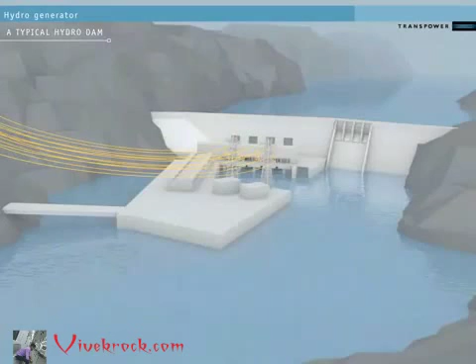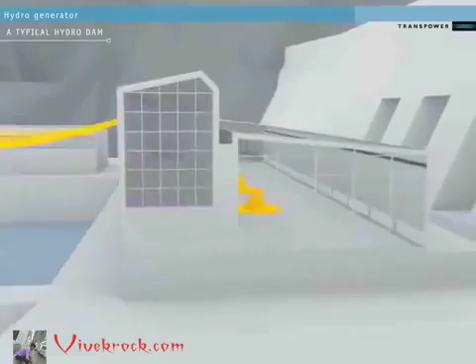From outside the station, we can't see the generators. If we approach, though, we can see the power lines or conductors that carry the electricity from the station to the national grid. Each power conductor connects to a turbine-powered generator inside the dam itself. Let's go inside the dam now and look at one hydro generator to see how the power is produced.

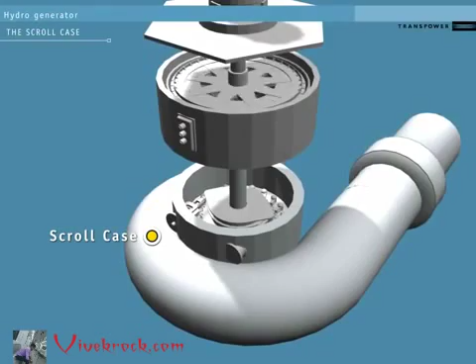The water from above the dam flows down through pipes called penstocks. Each penstock has its own headgate at the top to stop water flow for maintenance or during an emergency. At the end of the penstock is the scroll case. This curls around the turbine like a snail shell. It's designed to create a consistent pressure of water entering the turbine from all sides.

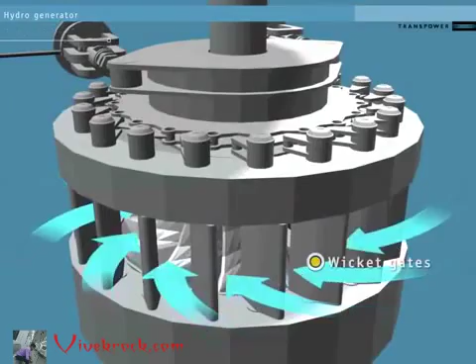Inside the scroll case is a set of vanes called the wicket gates. These control how water flows into the turbine. The wicket gates are controlled by an external governor system. This opens and closes them in response to conditions on the national grid. A high load on the system slows the turbine. The governor system reacts by opening the gates further to speed it back up. Conversely, it will narrow the wicket gates in response to low load on the system.

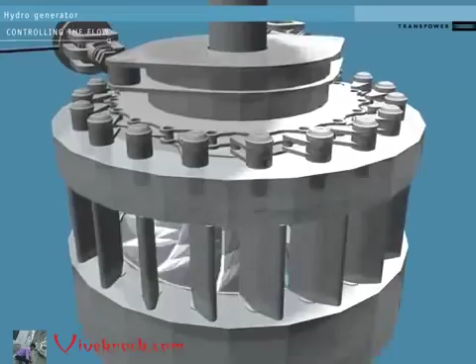Beyond the wicket gates, we can see the turbine blades. The blades are shaped to extract the most possible spin from the moving water. The turbine blades and the shaft connecting them to the generator are called the runner. We will expand this into its parts so we can see them clearly.

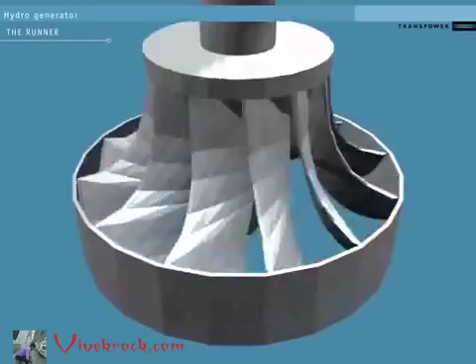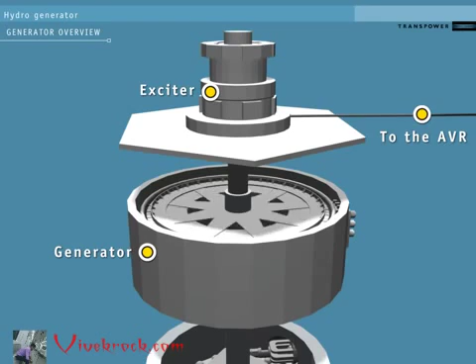At the top is the exciter, which gets a small DC power supply from a cable attached to an external controller called the Automatic Voltage Regulator, or the AVR. Below the exciter is the generator. The inside is a rotor, turned by the runner. The outside stationary part is the stator. This is made up of a set of 3 coils of copper wire called windings.

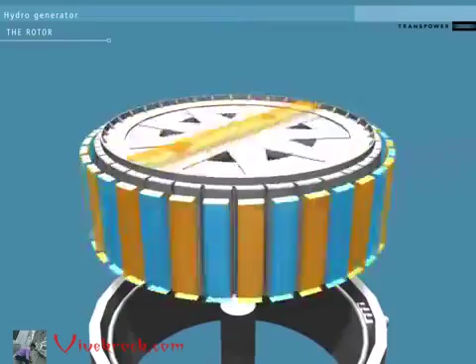On the rotor are a number of electromagnets, powered by the DC current from the exciter. If these are switched off, the turbine will be able to spin without generating any electricity. The magnets' poles on the outside of the rotor create a separate rotating magnetic field for each magnet. The magnets are lined up so that adjacent poles always have opposite fields to each other, north-south, north-south.

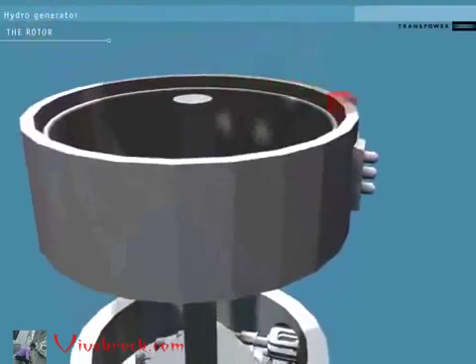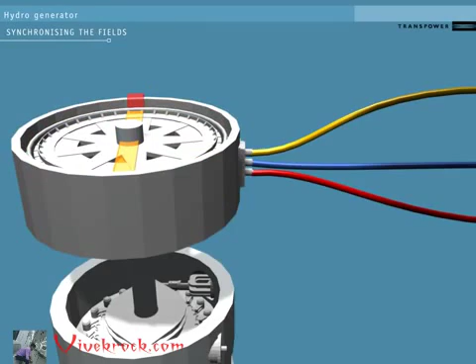As the rotor spins within the stator, each pole's magnetic field acts on the stator's windings. Each time a pole makes one full revolution, one pulse of AC power is generated in the windings and transmitted towards the grid by conductors attached to the stator. Because the stator is connected to the grid, it's important that the pulses are in time with the grid frequency. When the pulses are in time with the grid frequency, we say that the generator is synchronized.